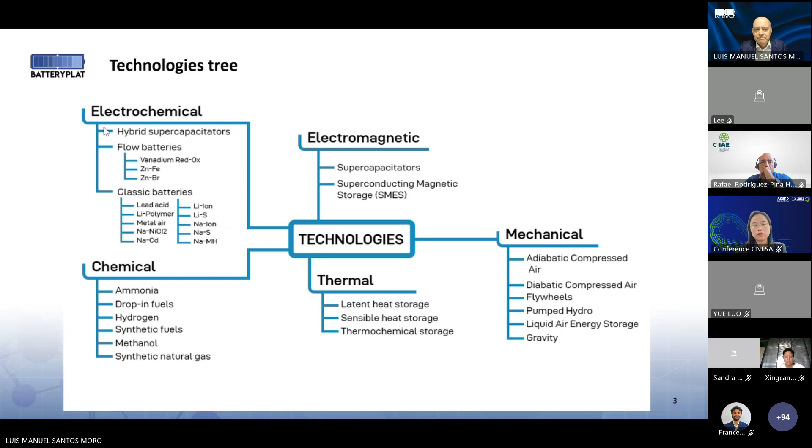So this first presentation is about R&D and energy storage in Spain.

Let me start sharing the screen. Okay. Okay, so you are seeing the screen, right? Yes, we are.

Okay. So this presentation from BatteryPlat is not just a collection of data. It is a layered approach based on 3 studies to help decisions for BatteryPlat and Spanish actors. This 3-layered approach is based on 3 studies: a technology maturity study, a technology intelligence study, and a capability map. The objective of this research is to understand where technology stands, where innovation is being projected, and where Spanish capabilities are located.

BatteryPlat is part of the Spanish energy storage strategy, and this strategy takes into account grid flexibility, industrial opportunity, and innovation agenda. And the BatteryPlat role is to connect public strategy with technology evidence and ecosystem capabilities. The 3 studies that have been used for this presentation are, first of all, a taxonomy study, then a technology watch and competitive intelligence study, and finally, an internal capability map. The idea is to combine the information and the data of these three studies to offer an overview of the global and Spanish energy storage sector, and also how the BatteryPlat members are located in this context.

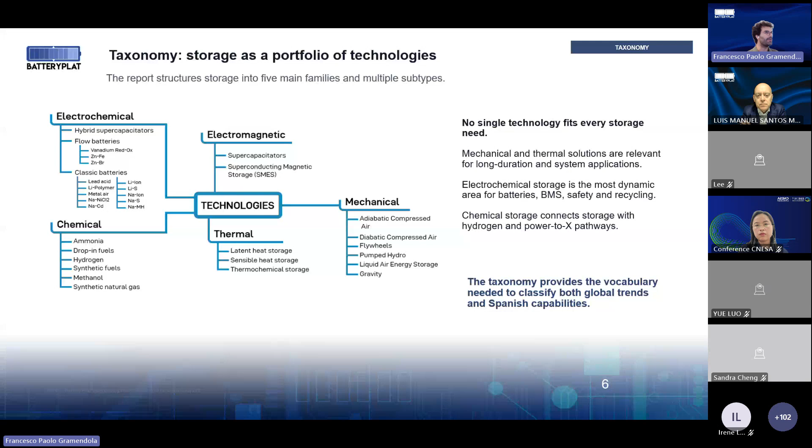For the study, we have used data from the Department of Energy of the United States and from the European Storage Technologies and Facilities database. Of course, the result of this study depends on the availability of sources and information about installed capacity all around the world. In this assessment, we have identified 5 different energy storage families: electrochemical, electromagnetic, mechanical, thermal, and chemical. This shows the broad scope that we have here in BatteryPlat, since we believe that no single technology fits every storage need. So we need a combination of several technologies.

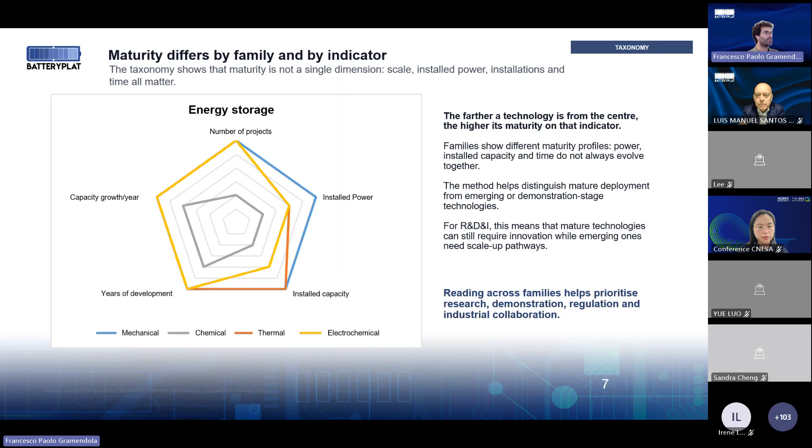The second study, as I was saying, is the Technology Watch and Competitive Intelligence study. In this study, we have analyzed almost 8,000 patent documents. We have detected almost 600 companies in a time range between 2019 and 2023. We're going to publish an update of this study in the next months. And the objective was to identify active patent holders, compare global activity, and then understand where Spain stands.

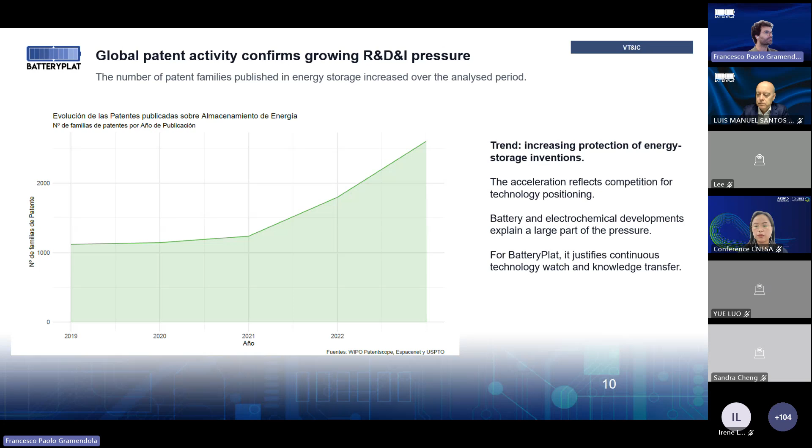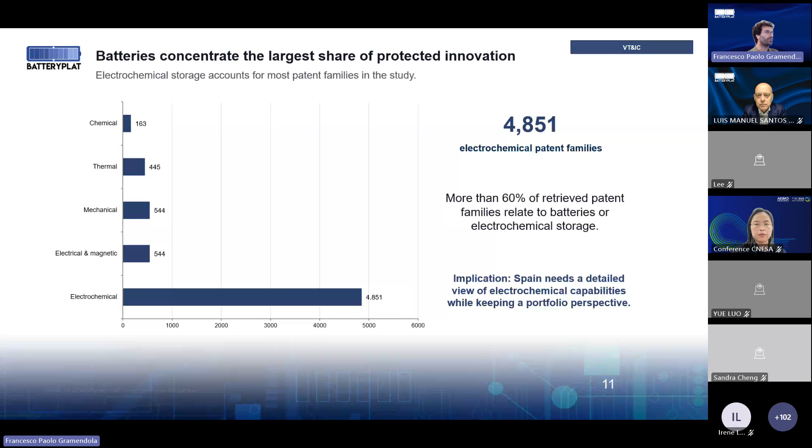Here you can see that most of the patents, more than 60% of them, have been detected in the electrochemical field, followed by electromagnetic, mechanical, thermal, and chemical energy storage. Although electrochemical is clearly the hotspot for innovation, there are still a lot of opportunities in the other technological families.

Since, as I said before, electrochemical storage is the main field where innovation is focusing right now, we are going to focus in the next slides on this family, since we don't have much time to focus on each one of them.

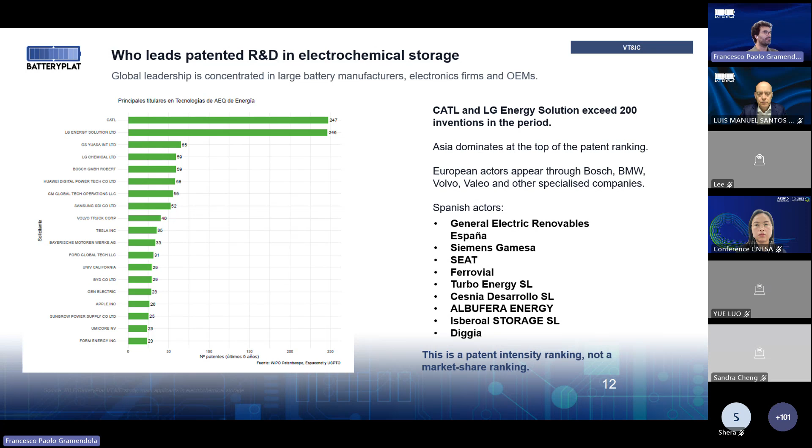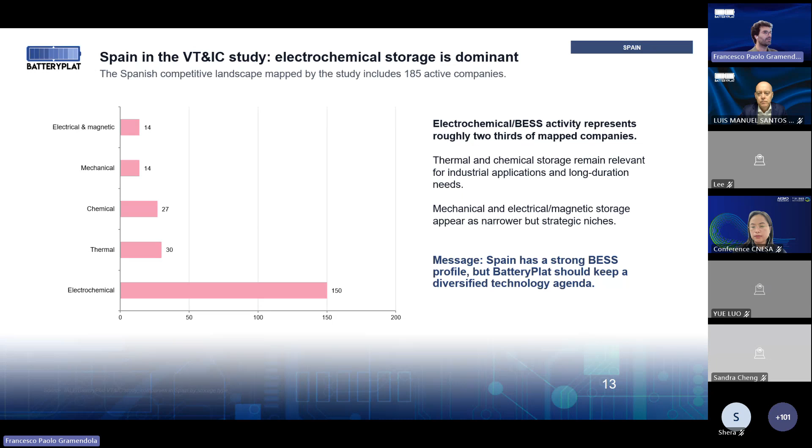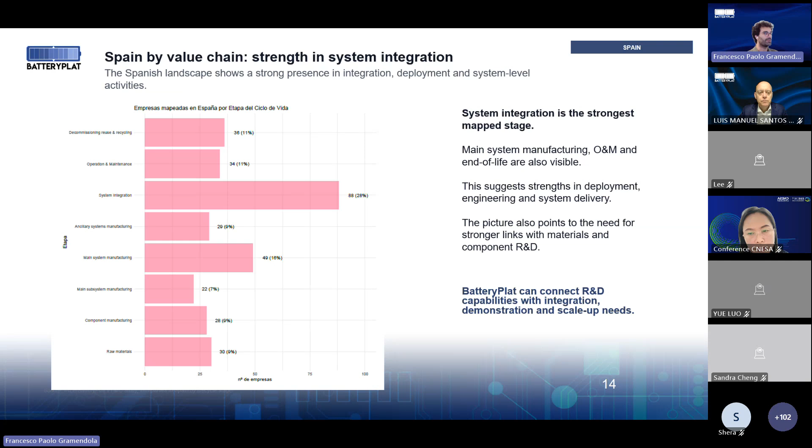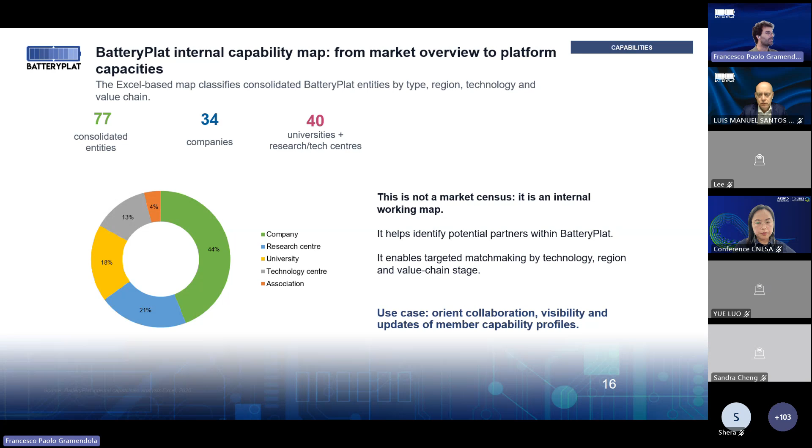The third study, as I was saying, is an internal capability map where we try to understand how our members are located in the value chain and in our technology tree to orient collaboration, visibility, and then update our member capability profiles. As you can see, most of our members, 44%, are companies, followed by research centers, universities, technology centers, and associations.

Here we can see how they are distributed along the value chain, the technology families, and the electrochemical subtype. About the value chain, most of them are system integrators, followed by consulting services, component manufacturing, raw material production. So we can extract the same conclusion that we did with the Spanish value chain. We can understand from this graphic where our strengths are and where collaboration can be offered for our members, and also which are the steps of the value chain where we can strengthen our collaboration.

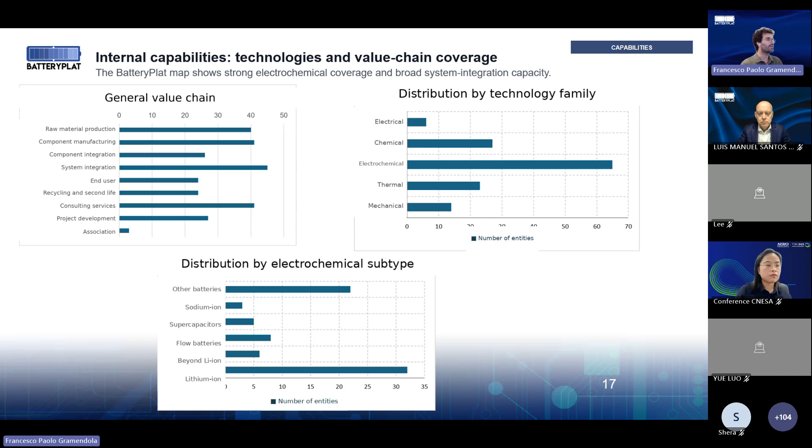So regarding the distribution across the technology families, most of them are focused on electrochemical, followed by chemical, thermal, mechanical, and electrical. And if we focus on technology, most of them work in the lithium-ion sector, followed by flow batteries, beyond lithium-ion, supercapacitors, sodium, and then other batteries.

To sum up what we've seen so far, a portfolio view is essential, since energy storage should be read as a complementary technology approach. Electrochemical storage right now represents the innovation hotspot of energy storage. The Spanish value chain shows strength in integration, operation, and maintenance. And the role of BatteryPlat is to convert this mapping into collaboration and allow matchmaking by region, the Spanish regions, but also worldwide. So the next step would be to use these findings to prioritize thematic workshops, regional outreach, and R&D matchmaking actions.

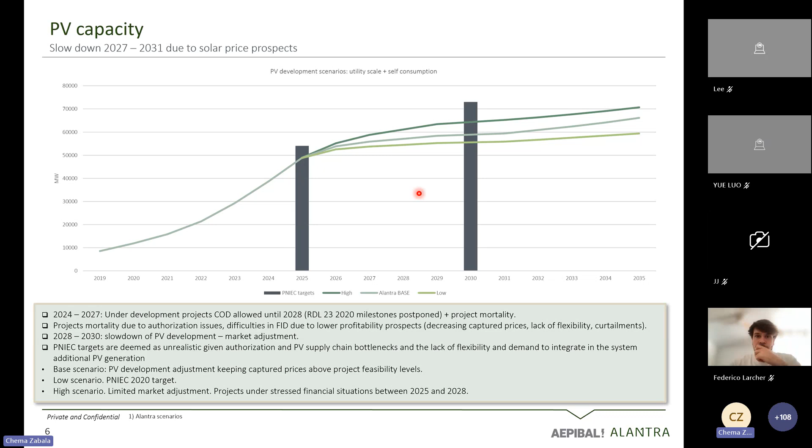It's true that we are seeing a strong inertia in the installation of PV, but we are expecting to see a significant slowdown going forward because of the lack of ability to integrate this additional PV capacity, the lack of flexibility that we are still having in the system, and also the lack of additional demand that hopefully will be entering into the market in the coming years.

So taking an overview on the business case for batteries, the market outlook, and the revenue stacking. What is worth highlighting in Spain is that since 2020, we are seeing that every single year the day-ahead prices in the central hours of the day are decreasing substantially, and on the contrary, peak prices in the system are increasing recurrently every single year. So basically, the gap between the low prices and the high prices in the system is increasing over time, and this is somehow showcasing an interesting business case for doing arbitrage in the system.

On top of that, because of the high renewable capacity that we have in the system right now, the cost of the balancing services, and particularly the aFRR reserve band, which is basically the secondary band, is constantly growing, and we are seeing that the system cost of Spain is booming, and this is a strong opportunity for batteries to tap into those revenues and eventually have an interesting business case as they compete against the CCGTs and the hydro plants for capturing the system cost that we have because of the huge capacity from renewables that is entering into the system.

Talking about the zero prices or very low prices in the central hours of the day, on a steady basis every single year the amount of hours with prices below 4 euros per megawatt hour is increasing. Basically, this year we will close the year with around 1,200 hours with reference price below 4 euros per megawatt hour. So the opportunity to charge a battery or a flexibility system in the central hours of the day and take advantage of the difference between peak and off-peak prices is, from our perspective, structural in the system and will remain for quite some time. Later on, we are going to provide our view on how this spread is going to evolve and what is the actual risk of reduction in these arbitrage opportunities in the system.

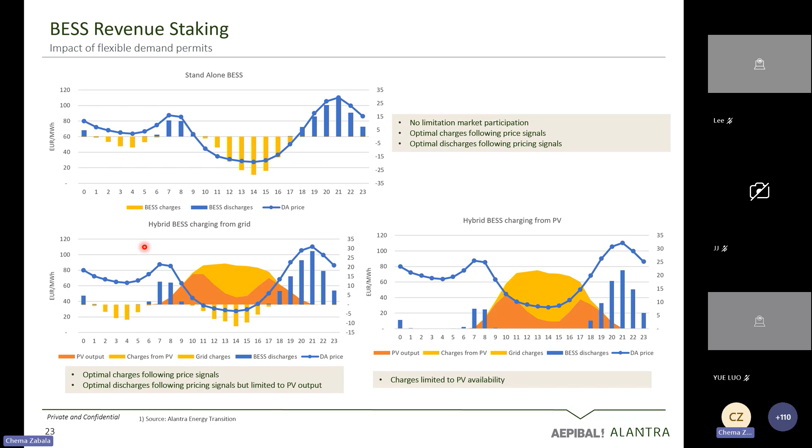So we are now in the process of discussing the flexible demand permits for batteries, because in the end, batteries will be having a flexible demand approach, meaning that if the system is suffering any sort of congestion, the batteries will be the first not allowed to consume from the grid if you are having a demand permit. So there are a number of ongoing changes that are worth evaluating in detail, because depending on where the battery is located, you might face some limitations if you are willing to charge your battery from the grid, and eventually this might have an impact on the revenue stacking model that you are aiming at capturing in the market.

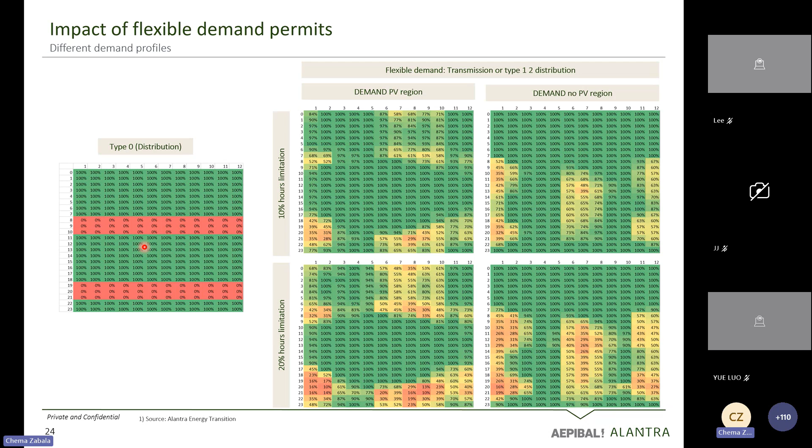Depending on where you are located and depending on the situation, right now we are discussing several frameworks for the flexible demand permits. I will not enter into all details, but it's worth evaluating in detail what the implications of the flexible demand permits will be. Another thing that is also worth mentioning is that we are seeing more and more interest in longer duration storage. So up to now, the main configurations that sponsors and investors were assessing in the Spanish market were around 2 hours or 4 hours storage duration.

What we are seeing is that in the long term, given the main operation and the arbitrage operation that batteries will be having in the system, depending on the evolution of capex of the energy component and power component of the batteries, solutions with 5-6 hours could make sense in the Spanish system, because we have a significant difference with the central hours of the day having low prices. These central hours of the day could last around 6 or 7 hours with very low prices. And as we mentioned before, the thermal gap that we still have in the evening amounts to around 8-9 hours. So probably longer duration storage is something that would make sense in the long term, and some sponsors are already evaluating it.

And this will depend, of course, on how capex evolves, and depending on whether capex is driven by the energy component or the capacity component, the optimal solution would shift toward longer or shorter duration of storage. Another thing that will probably give a lot of visibility to the development of batteries, and is right now in discussion, is the approval of the capacity market. This is the latest update that we have. We are expecting to have the final order and the final resolution, because it has already been approved by the European Commission, and we are expecting the first capacity auction probably after summer. This will give additional visibility to sponsors to have some baseline contracted revenue that will facilitate the financing of these projects, which is probably one of the main bottlenecks that we have right now in the system.

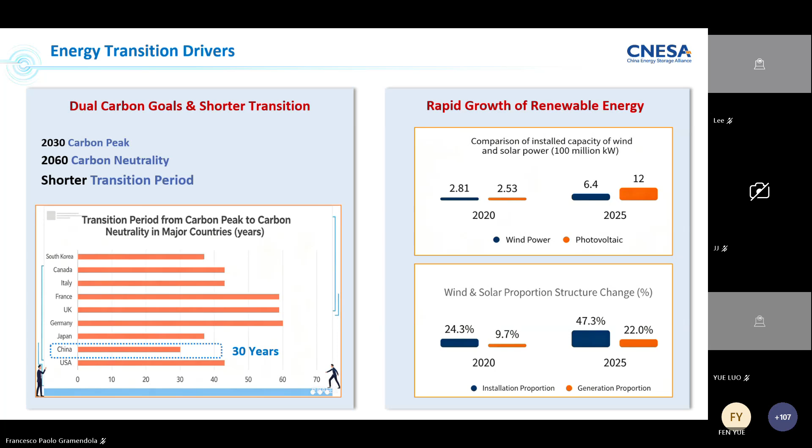Next page. However, renewable energy is variable by nature. As more renewable energy connects to the grid, new challenges emerge. The power system needs more flexibility resources to manage this variability and maintain reliability. However, few flexibility resources can expand as rapidly as renewable energy in China. The flexibility potential of coal-fired power plants is becoming increasingly limited after years of retrofitting. At the same time, pumped hydro storage takes a long time to build, often more than 8 years, and is also constrained by geography.

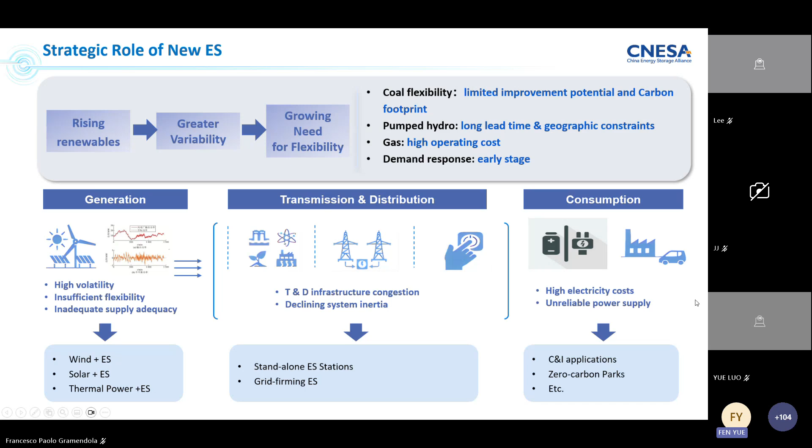Also, gas-fired power plants can certainly provide flexibility, but fuel costs remain high in China. Demand response and VPP have great potential, but they're still at a very early stage in China now. As a result, energy storage has expanded rapidly since 2020, driven by falling costs and shorter construction cycles. Today, energy storage is being deployed across the generation side, grid side, and the customer side. Next, please.

Let me move to China's market deployment. Next. By the end of 2025, China's total installed storage capacity exceeded 200 gigawatts already. This includes pumped hydro, lithium-ion, compressed air, thermal storage, and other technologies. New energy storage refers to all the storage technologies I just mentioned, except pumped hydro; the total capacity of new energy storage reached nearly 145 gigawatts.

A major milestone was reached last year as well. For the first time, pumped hydro accounted for less than 1/3 of China's total installed storage capacity, compared with around 90% just 5 years ago. That means battery storage has now become the main driver of market growth. Next, please.

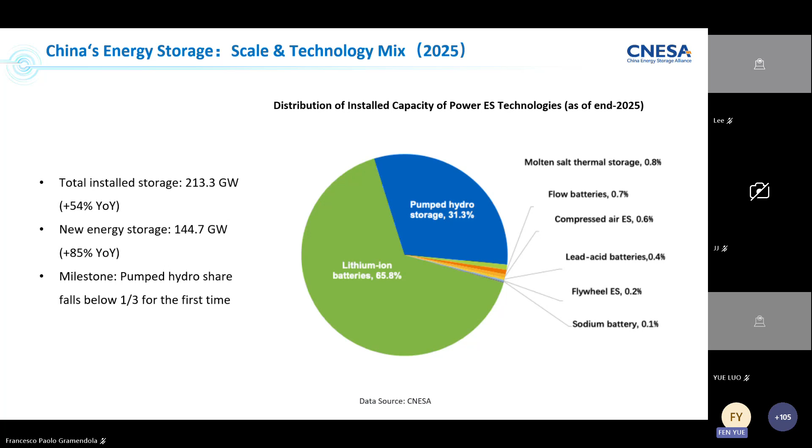In 2025 alone, China added more than 66 gigawatts of new energy storage. This is comparable to the total pumped hydro capacity built over previous decades. This remarkable growth has been closely linked to the rapid expansion of renewable energy. In 2025, China added nearly 120 gigawatts of wind power and more than 310 gigawatts of solar power, both reaching record highs. Next, please.

Today, storage has become a flexible asset for renewable integration. In China, renewable energy projects equipped with storage generally move through the grid connection process faster than those without storage. We can also see this trend in the numbers. The storage to wind and solar ratio increased from less than 1% in 2020 to nearly 8% in 2025. The message is very clear in China. Storage is no longer optional. It's becoming essential. Next, please. Next.

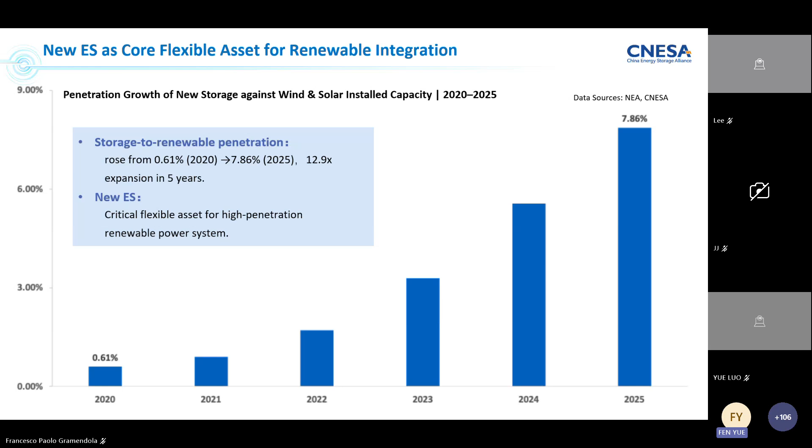Thank you. The market structure is also evolving in China. Utilities remain the major investors in grid-scale projects, but private capital is increasing quickly, especially in the standalone storage area. This reflects growing confidence in the commercial value of standalone storage. Next, please.

Next. These rankings reflect a highly active and increasingly competitive market. Competition is accelerating innovation in technology, improving product performance and driving down the cost of the products. Next, please.

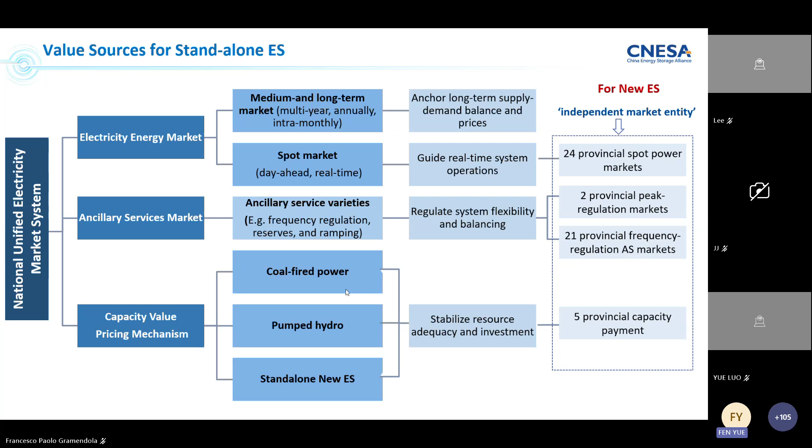There are three main revenue sources for standalone energy storage. The first is energy arbitrage, capturing value from electricity price differences across spot and medium to long-term electricity markets. Second, ancillary services such as frequency regulation. Compensation is typically linked to response speed, response duration, and performance accuracy. Third, capacity payment, which recognizes the value of storage in ensuring power system reliability.

Several provinces have introduced duration-based capacity compensation mechanisms for standalone energy storage. The design is based on the duration of the local evening peak demand period, and the compensation levels are benchmarked against coal-fired power plants, also considering each province's power supply-demand balance.

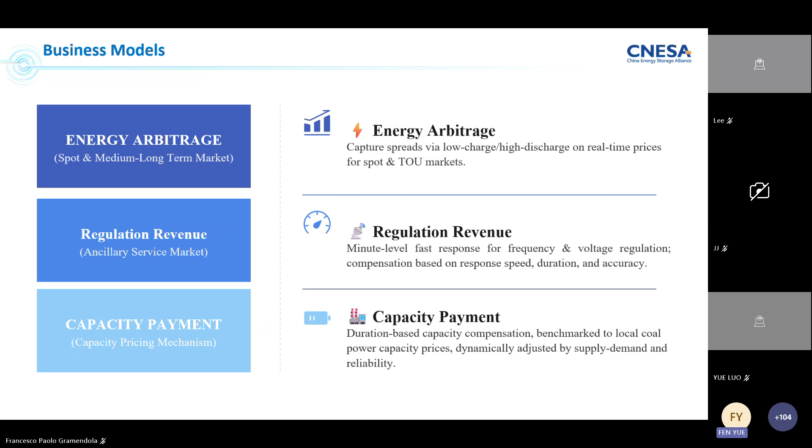For example, if a province's evening peak typically lasts 6 hours, then a 6-hour storage system is considered to provide its full capacity value. Overall, storage is moving from a single revenue model to multiple revenue streams in China. This significantly improves project bankability at the current stage. Next, please.

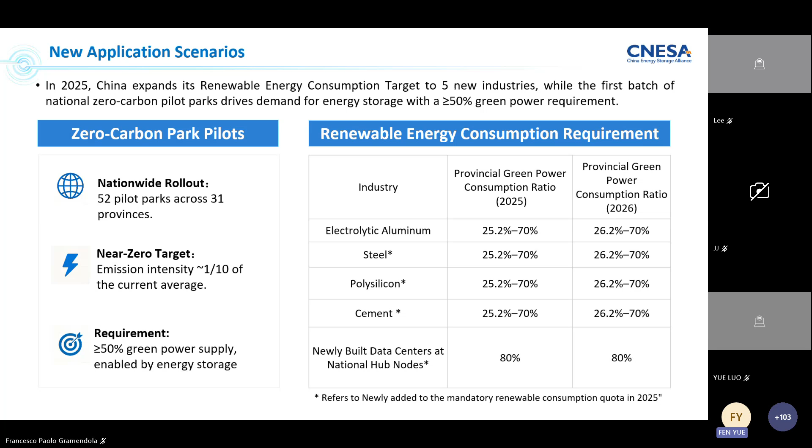New applications are also emerging beyond the grid. Two key areas are zero carbon industrial parks and renewable direct supply projects. China is also strengthening renewable electricity consumption requirements for sectors like steel, cement, and data centers. For example, new data centers are targeting up to 80% renewable electricity use. At the same time, China has launched 52 zero carbon industrial park pilot projects. These initiatives are creating strong demand for the combination of renewable energy and energy storage. Next, please.

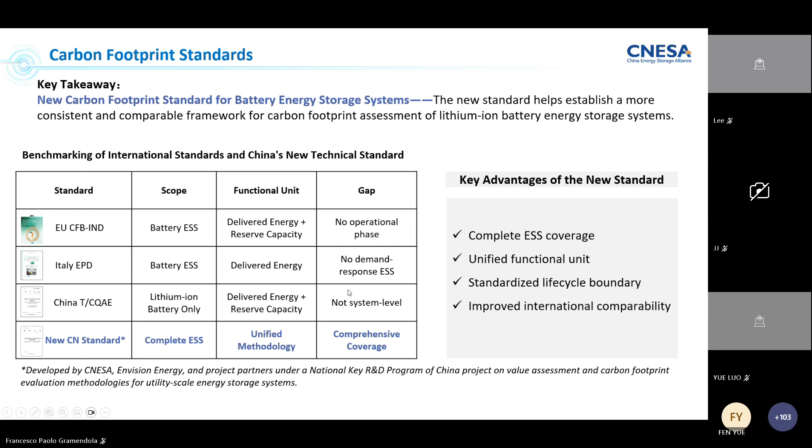In parallel, carbon accounting is becoming increasingly important. CNESA and its partners have developed a carbon footprint standard for battery storage systems. The goal is to establish a unified life cycle carbon accounting methodology. This will improve transparency between different projects and also support international comparability. Next, please. Next.

Looking ahead, two trends stand out in China's storage market. First, storage duration is increasing as well. The same thing happened in China, like Spain. The duration has grown from 2.1 hours in 2021 to 2.6 hours in 2025, and it's expected to continue increasing towards 2030. According to CNESA projection, the duration will increase to nearly 3.5 hours by the end of 2030. Next, please.

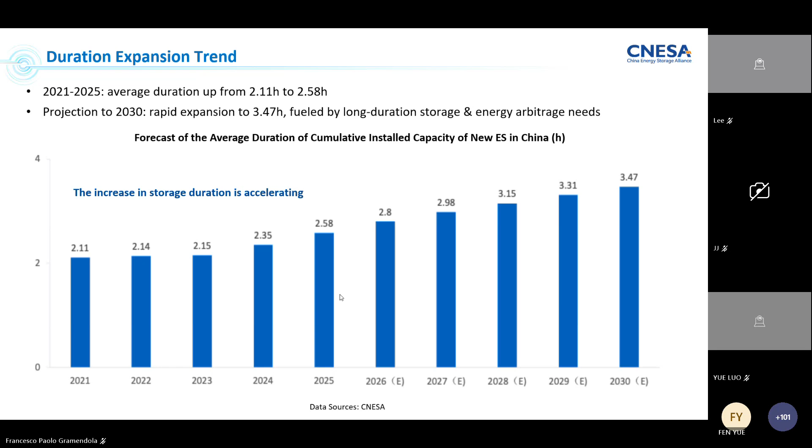Second, the market is shifting from scale-driven growth to quality-driven growth. Although growth rates may gradually slow, annual installations are expected to remain at a very high level. According to CNESA forecast, China's cumulative new energy storage capacity will continue to grow rapidly towards 2030, reaching nearly 370 gigawatts and 450 gigawatts in two different scenarios.

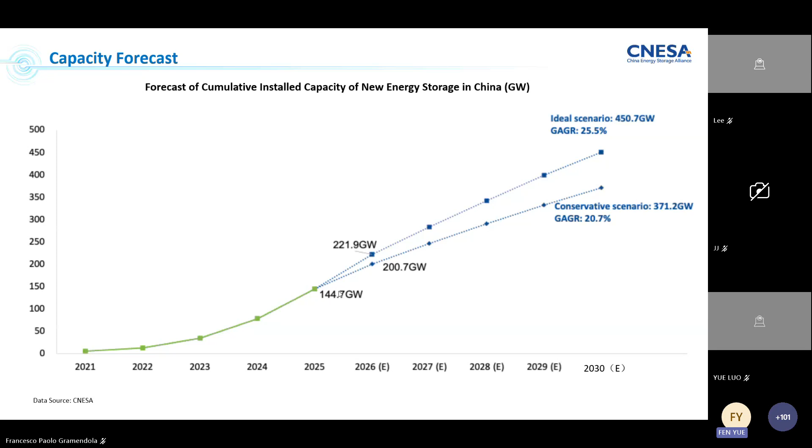Next, please. To conclude, I would like to leave you with 3 key messages. First, the rapid expansion of renewable energy has created tremendous opportunities for storage. Second, China's energy storage market is shifting from policy-driven to market-driven growth. Going forward, market rules will increasingly determine project revenues, especially for standalone energy storage. Revenue opportunities vary significantly across different provinces and even between different grid locations within the same province, depending on the local market design and power system conditions.

The third one is innovation in market mechanisms, business models and carbon accounting will define the next stage of the industry development. Next, please. Some numbers and outcomes were supported by the National Key R&D Program of China. Next, please.

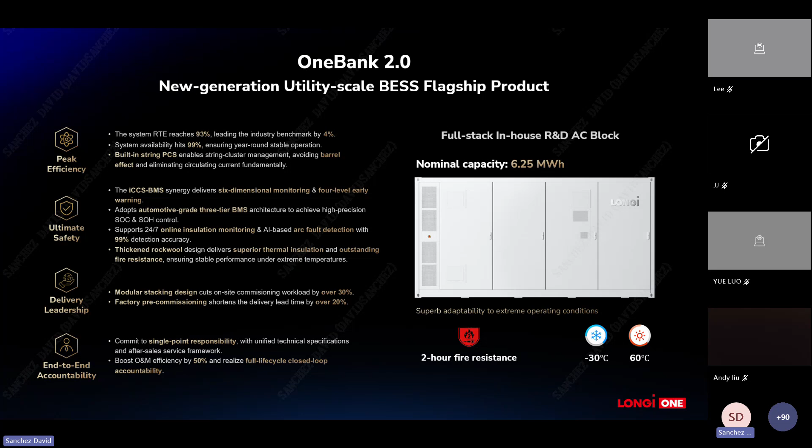So we know very well that through the last years, the solar PV string inverters took over the European market, and this is going to happen also with the storage industry, and it's not for no reason, right? So in the end, it's just about modularity brings more availability. More availability delivers better results and better IRR to our customers, right? So this is happening exactly the same path in the storage industry, where the solutions based on string PCS will actually deliver a better result, better performance, and lower LCOEs.

And one very important flagship from LONGi is safety. So we are very proud that in more than 13 gigawatt hours delivered, we have a 0 thermal runaway record, right? Which is very impressive, and it's actually a key part of the bankability of the product, because everything in this BESS industry goes around financial bankability, product, and safety, right? In order to get the right financing and the right approach and financial model for the BESS plants.

So here, LONGi has invested massively, a lot of resources and R&D with our own patents, in a way that we have what we call ICCS, Intelligent Cell Control System, which will control all the battery packs in terms of current, short circuit current, voltage, and resistance. All this will lead to our algorithm being able to forecast any potential issues several months in advance.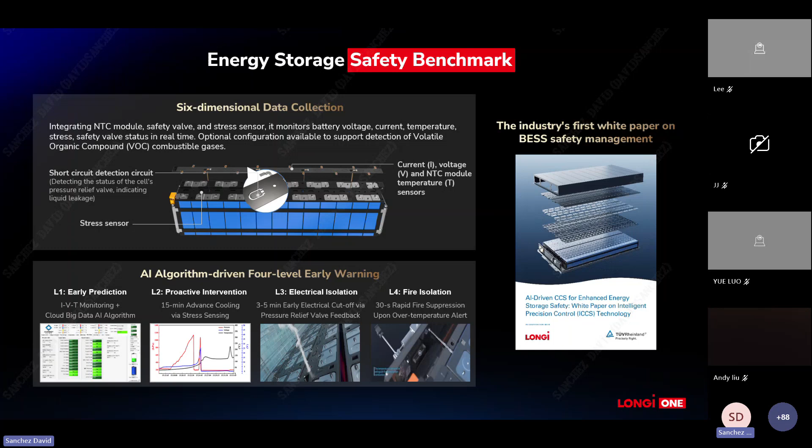As I said, this is something that is actually certified by a third party, and is one of the flagships of LONGi: safety and 0 thermal runaway in more than 13 years. And for this, it's very important to remember that LONGi actually comes from the automotive. So all the storage products come from the automotive industry, right?

Which has very, very high standards in terms of safety and performance. And we actually have a 3-level BMS system, right? With cell level monitoring, module level monitoring, and cluster level monitoring. As I said, this is actually of the essence for our own system, in order to guarantee the zero thermal runaway and the safety forecast that we are actually quite proud of.

In terms of the PCS, the very same way that the solar market gravitated from central inverters to a massive adoption of string inverters, this will happen very similarly in the battery storage industry, which again is an industry that is still under the maturing process. But for sure, one of the key parts of the maturing process is customers looking for lower LCOEs. And the lower LCOEs can be achieved through a higher availability. And this can only be achieved with string PCS.

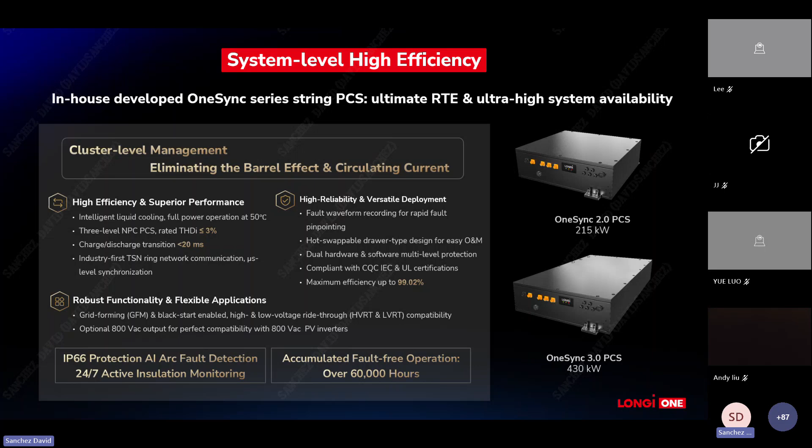But not only this, in the end, you have the barrel effect and circulating current that is limited. You have a lower THD behavior, you will have a higher DC insulation, you will have a better arc fault protection, right? So all the indicators and all the experience that we have in this European market, a very mature market, tell us that the string PCS is going to be the next big thing, the next big innovation, and those players who adopt this will definitely be able to supply a more performant solution to all the players in Europe.

And as I said, it's not for no reason. When you have a string PCS, you have full modularity compared to a centralized PCS. You have full insulation, limited in the case of central PCS. You have way higher operational availability, right? More than 99% in most of the cases. When you have any issue and you lose the PCS, you lose 230 kilowatts. You don't lose more than 1 mega up to 5 megas, right?

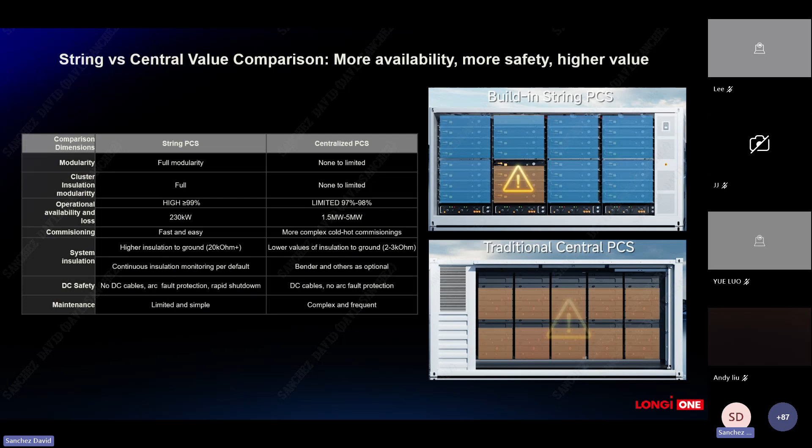The system insulation works with a higher insulation level, normally more than 20K ohm. In the case of centralized inverters, the PCS is less than that. Also arc fault detection and monitoring, no DC cable. And when it comes to commissioning, everything is in broadcast mode, everything is faster, everything is easier, right? So for sure, all the indications tell us that the next big innovation in the storage market is going to be containers based on string PCS, and LONGi is already on that path.

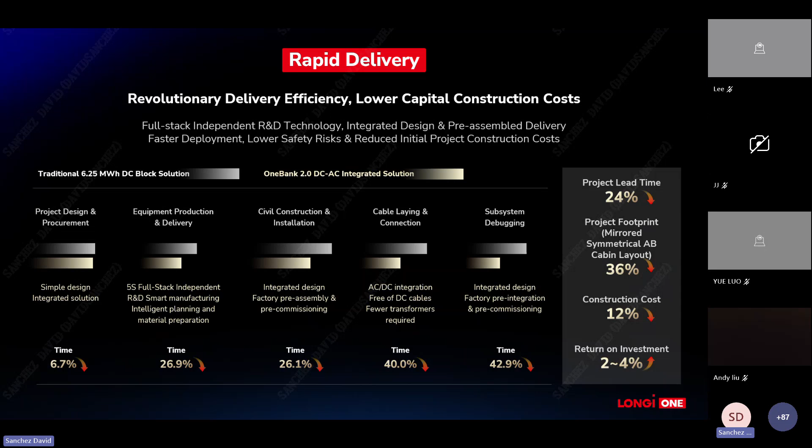In terms of savings, using the LONGi solution, a solution based on string PCS, you will have savings on project design, on procurement, on production, on delivery, civil construction and BOS, cable laying, and subsystem debugging, right? So everything will make the system cheaper, more competitive, and with a higher IRR.

And one very critical thing about LONGi. LONGi is, as I said, one of the biggest players in the market, one of the biggest Chinese players in the market. And we have a global footprint. Not only do we have production factories all over the globe, but we also have a very strong presence from the logistics and sales point of view, which allows us to deploy our strategy in Europe very rapidly.

What is our strategy in Europe? It is the build-up, where we already have very good progress, of what we call the Centers of Excellence, the COEs, all across Europe. These Centers of Excellence will be a hub for local technical competency, very focused on local support to our local customers, from Spain to Germany, from France to Italy, to the UK. This is part of our strategy.

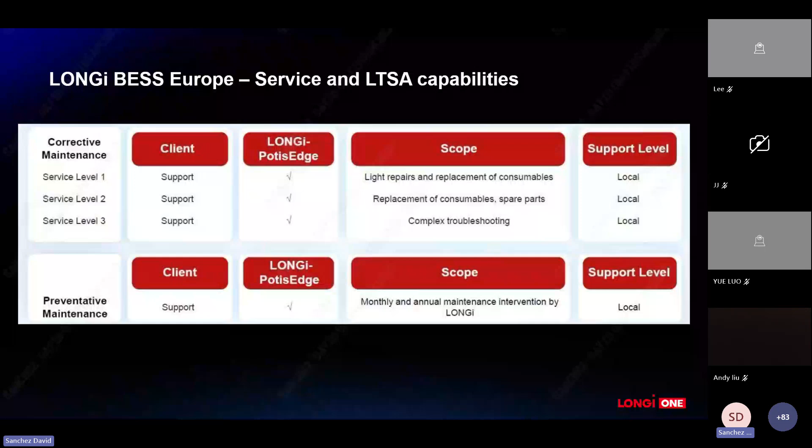And also finally, let me please highlight that LONGi is also investing massively in other markets like the Australian market or the US market. If anyone is interested, I would be happy to describe offline and go through the details of the US and Australia market.

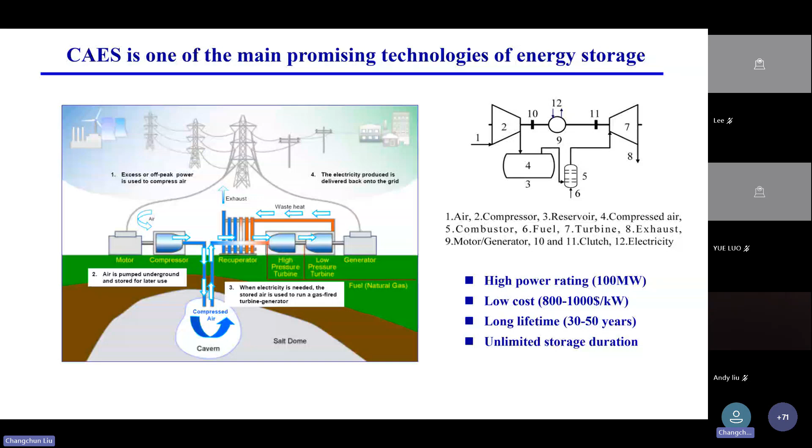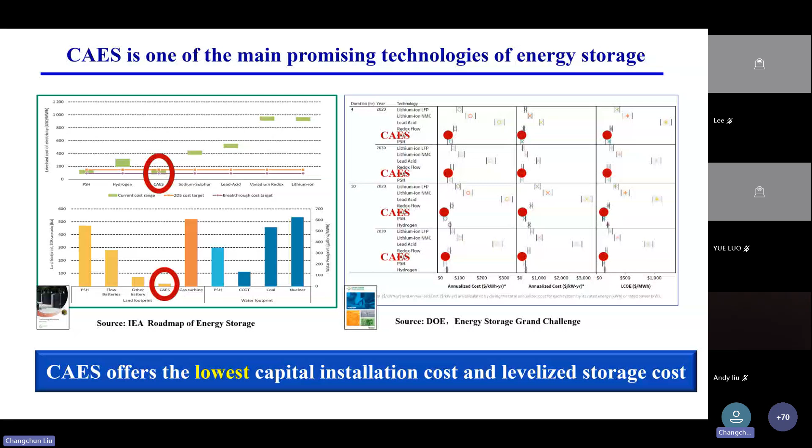This is a report from the IEA, which compares the available energy storage technologies like batteries and compressed air energy storage systems, and concludes that compressed air energy storage offers the lowest capital installation cost and levelized storage cost. They also predict that by 2030 the global compressed air energy storage installed capacity will reach 60 gigawatt hours per year, covering 37.5% of total energy storage capacity.

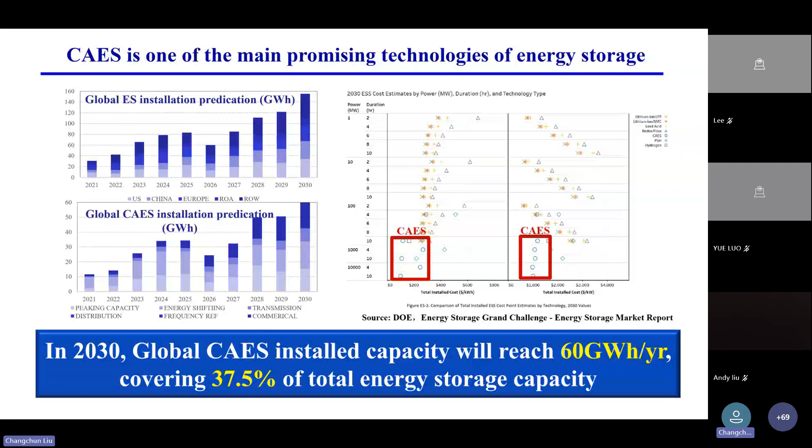And this is the state of conventional compressed air energy storage systems. You can see commercial compressed air energy storage plants were constructed in many countries. However, there are some challenges with conventional compressed air energy storage. For example, it needs natural gas during the discharge process, its efficiency is low, about 40 to 50%, and it releases some carbon dioxide during the discharge process.

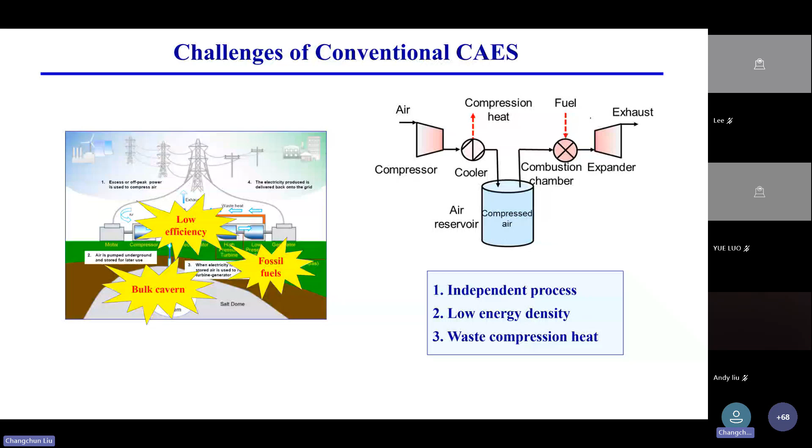So our overall strategy is advanced compressed air energy storage. First is to use high efficiency compression and expansion, heat transfer and storage at supercritical state to improve efficiency. Second is to use liquid and high pressure storage to avoid relying on cavern storage. Third is recycling the compression heat to avoid fossil fuels. The challenges are relying on caverns, relying on fossil fuels, and low efficiency. So our solution is to recycle the compression heat, use high pressure storage, and improve efficiency with advanced compressed air energy storage systems.

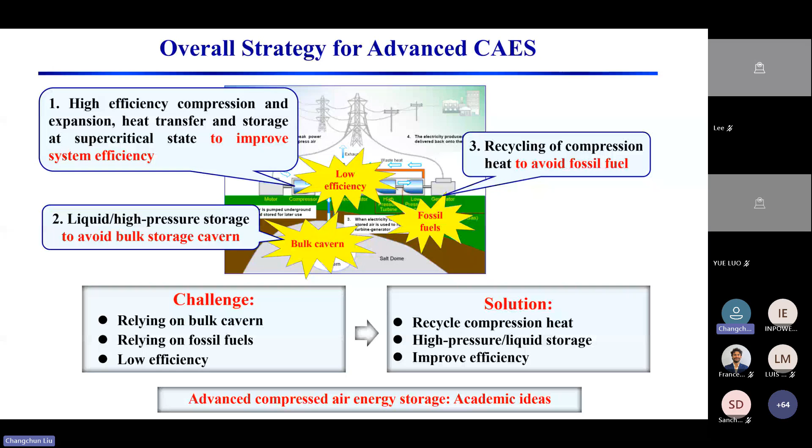For example, you can see that for the conventional compressed air energy storage system, the compression heat is released, and during the discharge process, natural gas is required to raise the temperature of the air and then expand it. But for the advanced compressed air energy storage system, we use heat storage to reuse the compression heat, and there is little need for natural gas.

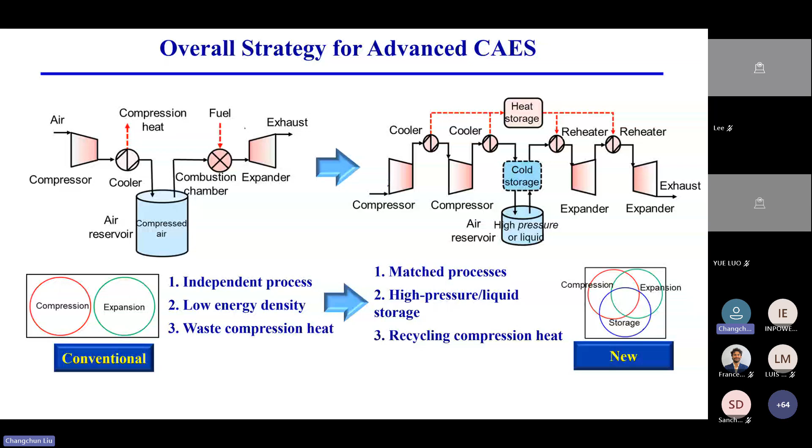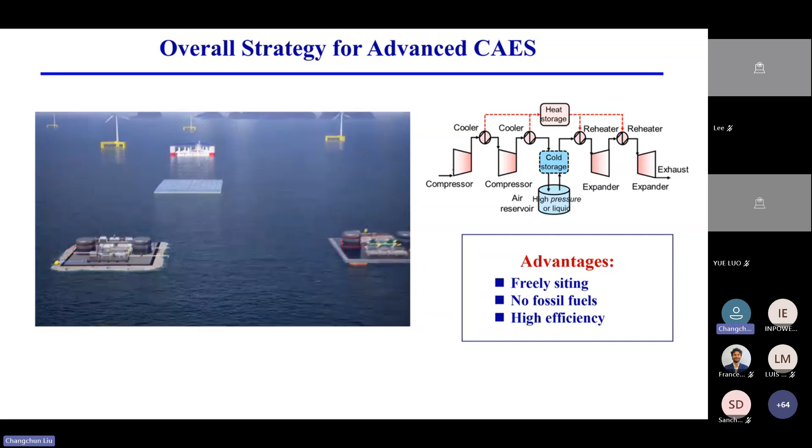As for the underwater compressed energy storage system, we use underwater flexible airbags or open rigid cabins to store compressed air. So during the charging process and discharging process, the pressure in the air storage cabins is constant, so the compressor and the turbine can operate at all times. So the advantages of the advanced compressed energy storage are no fossil fuels and high efficiency.

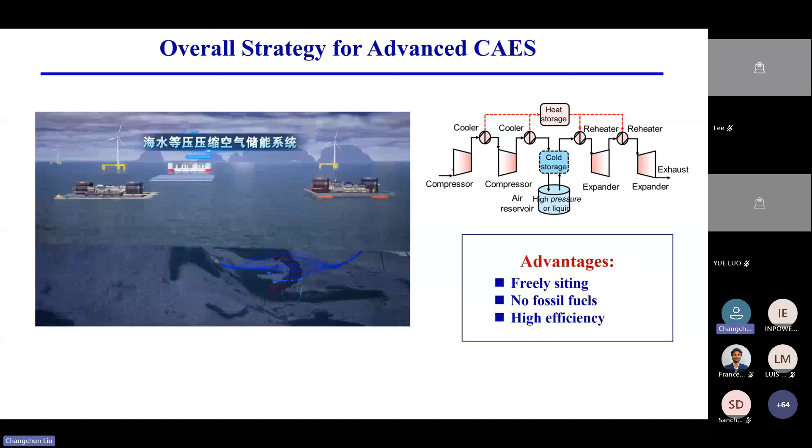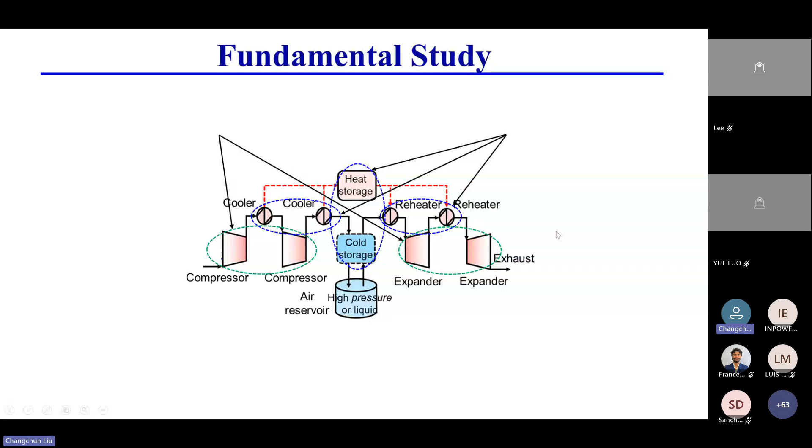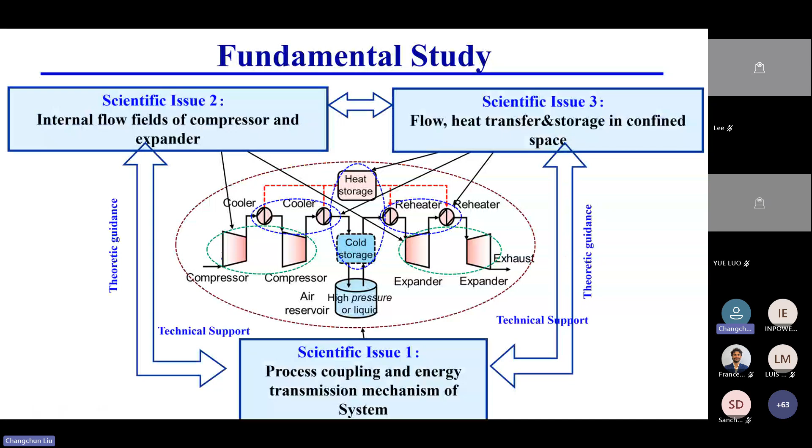So there are three fundamental scientific issues about this compressed energy storage system. The first one is the process coupling and the energy transmission mechanism, then the flow field of compressors and expanders, and the third is the flow and heat transfer and storage in confined space. So the technology we develop has three parts. Technology one is the system optimization and design, technology two is the 3D design of compressors and expanders, and technology three is the compact heat transfer and storage with high efficiency.

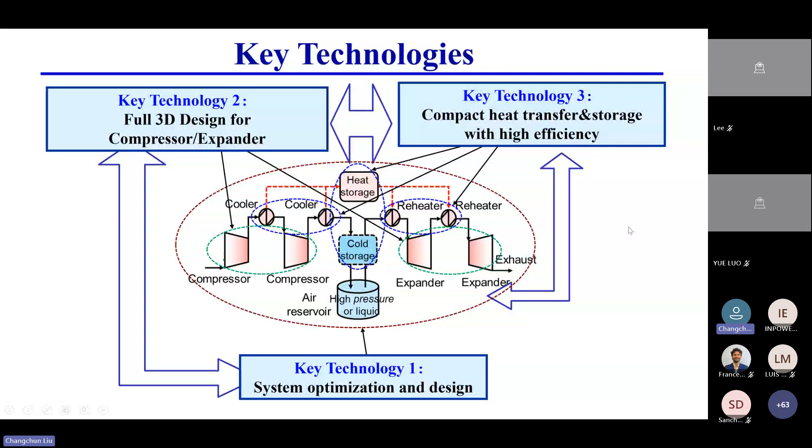This is an introduction of our 1 megawatt underwater compressed energy storage experiment system. This is with two eddy current dynamometers for the turbine power output. The eddy current dynamometer is for fast, sensitive speed control during the startup. And the hydraulic dynamometer is for high capacity but slower response to share the load.

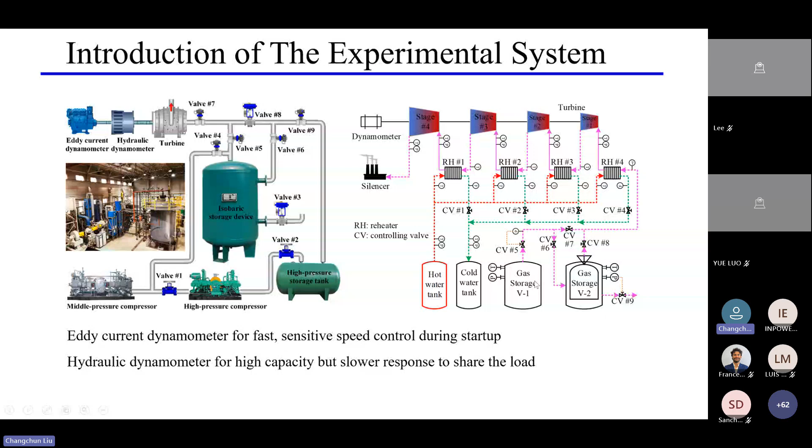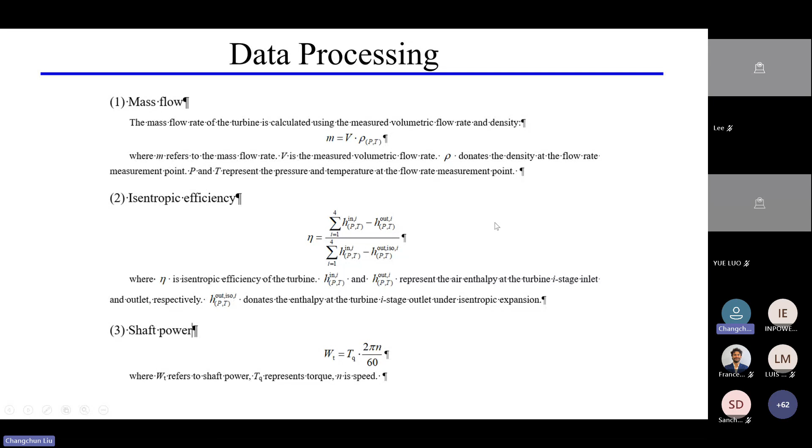And these are the parameters that we used during the experiment, meaning the temperature, pressure, volume flow, mass flow, and power. And we use the mass flow, isentropic efficiency and shaft power to evaluate this system. And these are the experiment results about the discharge process. As you can see, the temperature and the pressure during the discharge process are constant. And this is the airbag storage.

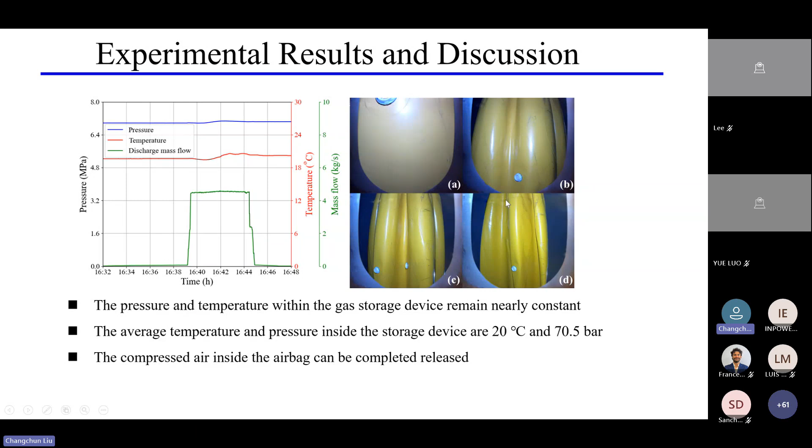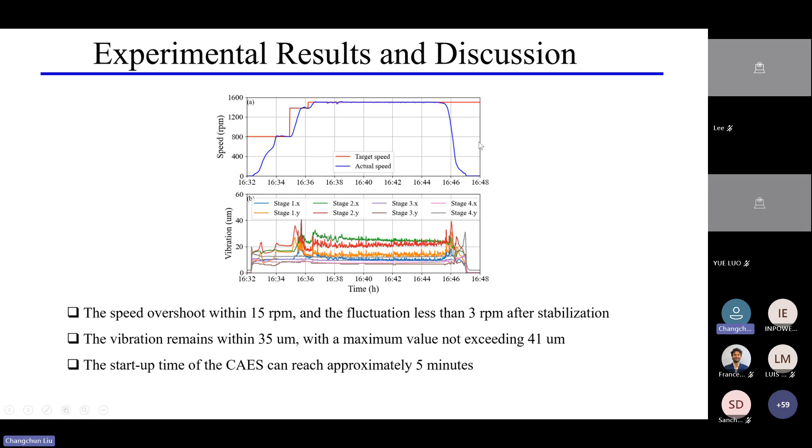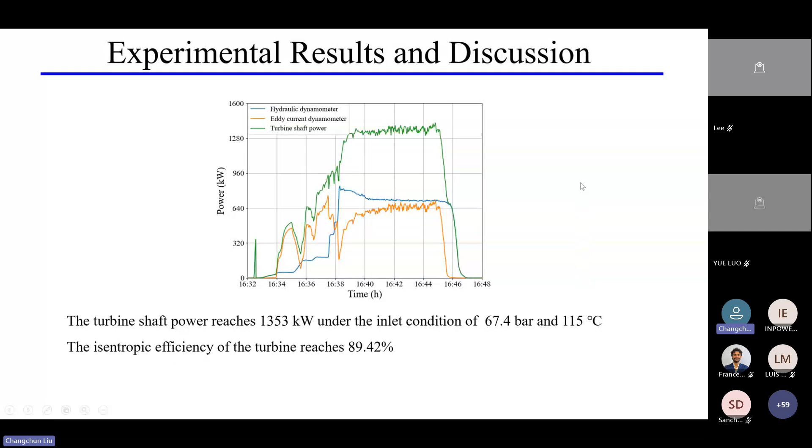For this 1 megawatt underwater compressed energy storage, the turbine shaft power reaches 1.3 megawatts under the inlet condition of 6.74 megapascals and 115 degrees Celsius, and the isentropic efficiency of the turbine reaches 89%. And this is the video of the 1 megawatt underwater compressed energy storage system discharge process.

For the underwater compressed energy storage system, when compared with the isochoric compressed energy storage system, the efficiency can be increased by about 1 to 5%, and the density is increased from 3.5 to 7.3.